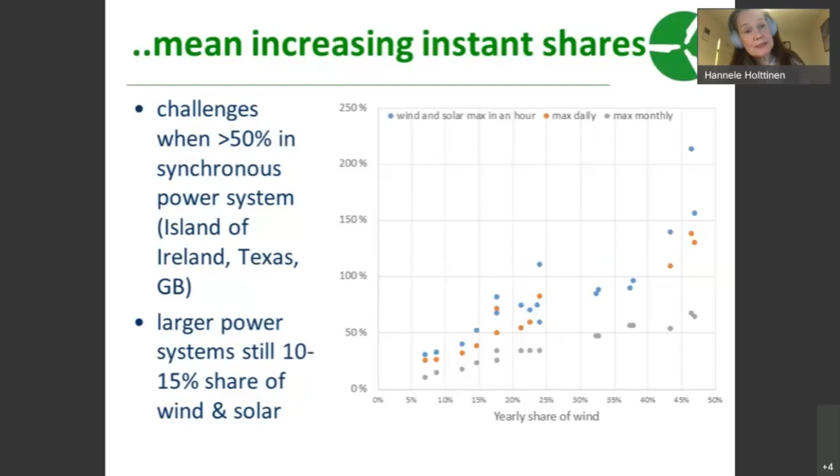Indeed, these statistics mostly cover countries, but what we really know about the challenges is when in a synchronous power system you have more than 50% share of wind or solar. And in these countries, of course it's Ireland, Texas and Great Britain that already have a synchronous system at more or less the country or state level. But for the larger power systems, we still have a 10 to 15% share, which is of course also increasing quite fast.

So the first thing we did quite a lot in the national work previously was to look at the time series inputs to the integration studies, and to capture the smoothing impact that is really pronounced for wind. So now we have more and more real data that can be used, and also better model data coming from meteorologists. But here are some examples.

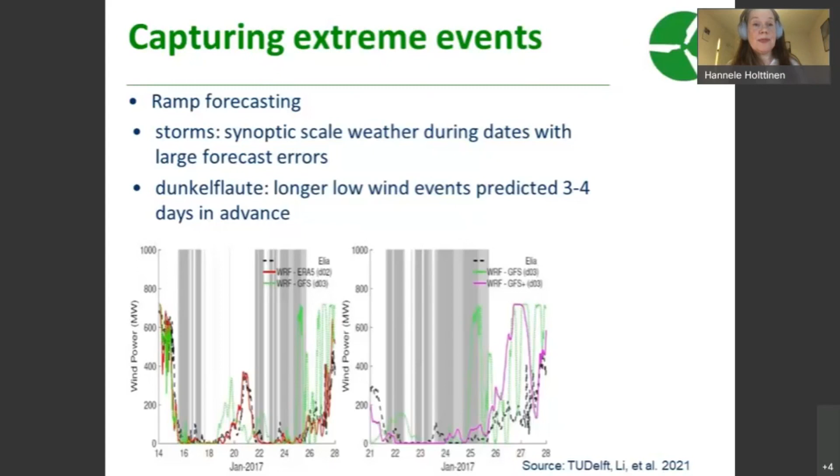And we have also interesting results from Germany showing how much of the large wind forecast errors are actually due to storms. And another thing, for the longer term resource adequacy, is how to capture what in Germany they call the Dunkelflaute. It's a no sun, no wind situation that can last longer, and predicting them seems to be now okay 3 to 4 days before. This picture shows the red line 2 days before quite well following the dotted line that actually happened.

And we see in all countries going for wind and solar that there are more investments in transmission, which can be partly integrated into renewals of aging assets. And to get this actually built means, at least in Europe, that public engagement with citizens and social acceptance is also something where system operators need to put a lot of effort.

Also, we see the benefits of looking beyond one country, at larger regional transmission planning. Here is an example from a recent ESIG publication summarizing nicely the transmission benefits of the larger interconnected system in the US, and even a macrogrid overlay.

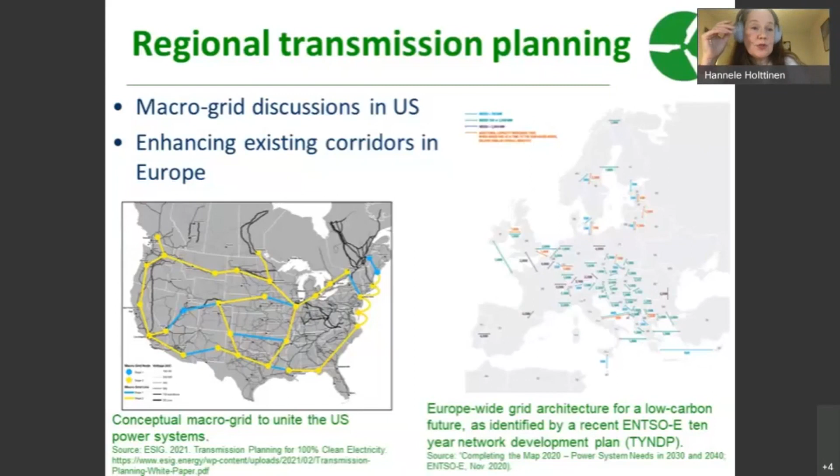And the European example is from ENTSO-E, the European TSO group that publishes every 2 years their 10-year network development plan. It has also been studied in Europe whether it would be beneficial to have a macrogrid overlay. So far, it looks like it's more cost efficient to go with the existing, pretty well meshed grid and reinforce that.

But of course, in Europe, what we see as a big new, almost macrogrid type of thing is the offshore grids. There's a huge ambition for the European Union and Great Britain to build more offshore wind power plants for reaching the net zero carbon targets, and to do that cost efficiently using meshed offshore grids and offshore hubs. Energy islands are a very interesting development. And still in development, because most of these offshore wind power plants are still connected with radial lines to one country. And the HVDC technology improvements are ongoing and indeed needed.

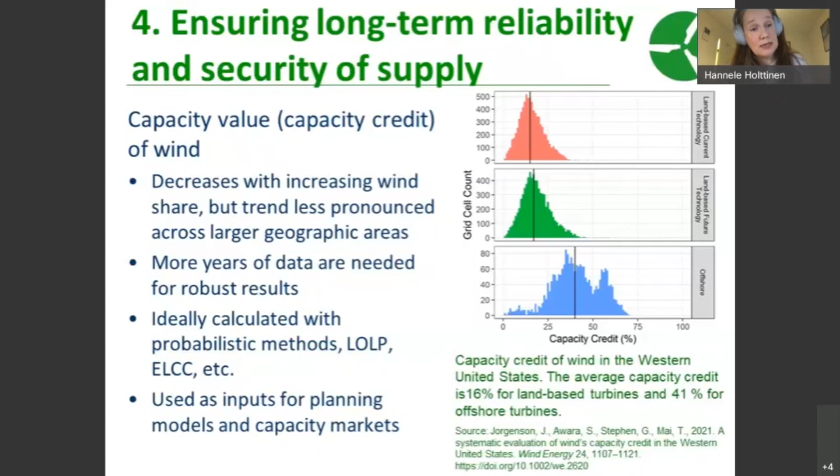And what we have seen very clearly in some examples is that you really need a lot of data to get robust results. In some countries, 10 years is enough, but in others, 20 or even 30 years of data is needed to really get robust results and capture all the weather events. Ideally, this is calculated with probabilistic methods like loss of load probability and effective load carrying capability. This is used as input for planning models, and capacity markets also need this kind of input for the capacity value of wind.

Moving towards resource adequacy in future systems, this is again showing some nice work from ESIG, looking at the improvements of the methods that we need for high share wind and solar systems of the future. It's important to include coordination with neighboring areas, have more data to reflect all the events, and also capture more about the potential loss of load.

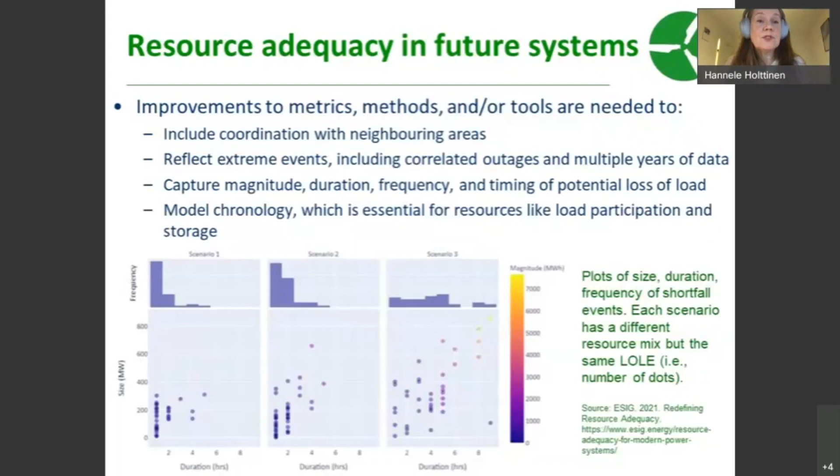Here is an example highlighting that even if your loss of load expectancy is the same in different cases, you can have either many shallow and short problems, or some of the events are really long lasting and severe. So you need to start looking more in detail. And I think generally the need for tool development is really high, because normally they don't capture chronology. And when we want resources like load and storage, we need the tools to work differently.

Then going to short-term reliability. The first example is the operating reserve. This has traditionally been the first result of any wind integration study, showing the impact of variability and uncertainty on the reserves that system operators carry. And the question is how much? Here is an example from a recent EU project, SysFlex, for one of their scenarios, showing the impact of reliability level. So basically, if you can lower the reliability target a bit, you have a clear impact on the operating reserves that you need to carry.

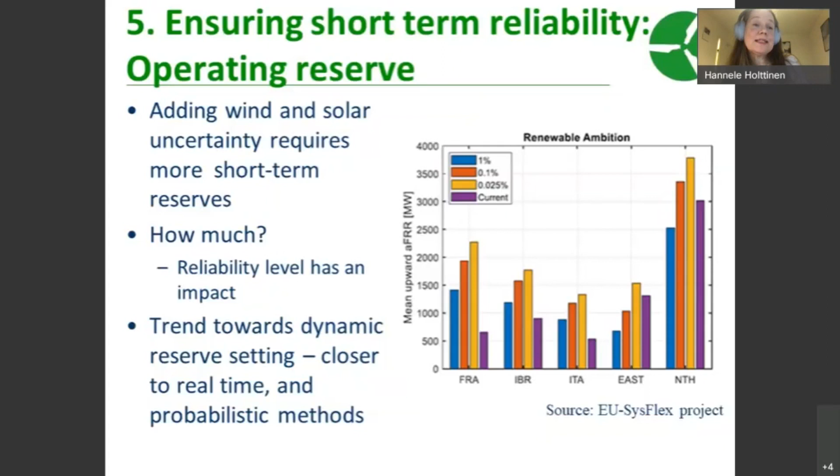Then going to another short-term issue, and that's the stability. So far from the experience, what concerns have there been? So basically it has been about responses to fault situations. So how is the grid code setting, for example, starting to require that the wind power plants have fault ride-through, and then having the experience from South Australia, very severe storms, having a lot of lightning, that actually you need to have many consecutive faults that you need to ride through during a storm.

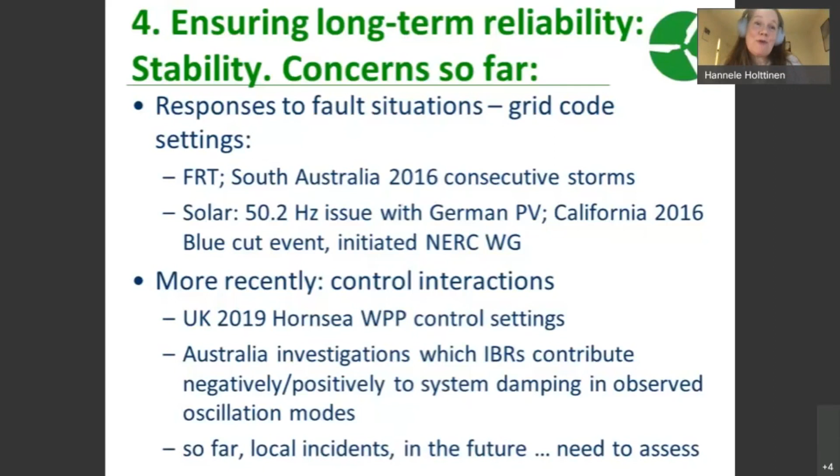But more recently, there have been also some control interactions that have been seen in the UK, and that has been investigated in Australia. So far, local incidents, but in future we really need to assess these more. And I think that the next ESIG webinar next week from the Great Britain system operator will tell something more about this.

For frequency stability, this was the main concern of the smaller system of the island of Ireland. So what they are doing is they limit wind. They have a so-called system non-synchronous penetration level that they follow. And if it goes over that, then wind is curtailed. And then as they get more and more wind, they have a program of enabling this in system operation, so they started with 50% and quite soon went to 60%, and now they are already reaching 70 and 75% SNSP limit in their operation.

For medium-sized systems, we have already seen that new tools to monitor inertia real time and day ahead are used, so it's important that they check even if these situations are rare. And for larger systems, it hasn't been an issue really. But what has been noted in the European system is that system splits could happen, and then again this can be more of an issue. And there's a recent ENTSO-E report looking at this more in detail that came out in December.

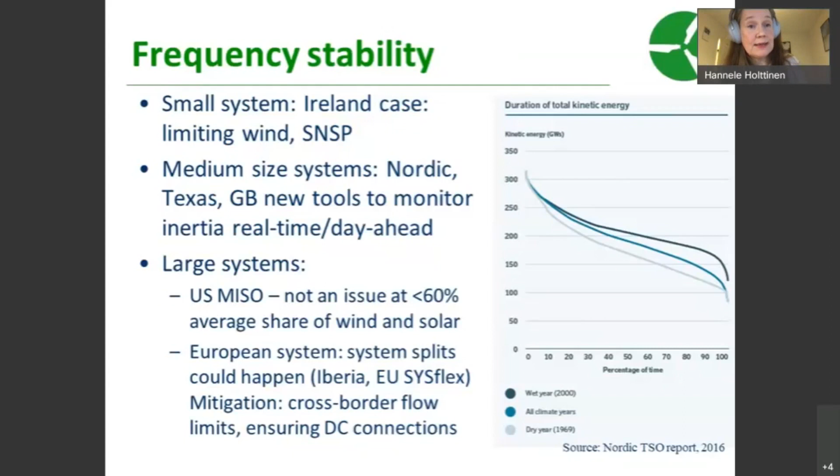So how to support frequency stability? You can maintain your inertia by keeping synchronous machines running, sort of must-run generators. This is a very traditional way of doing it, which works in the beginning. You have other sources of synchronous inertia, like synchronous condensers, or you can speed up the frequency response. So this fast frequency response is actually coming in several places in Europe and in Texas also, as a new frequency control service that will help the situations of low inertia.

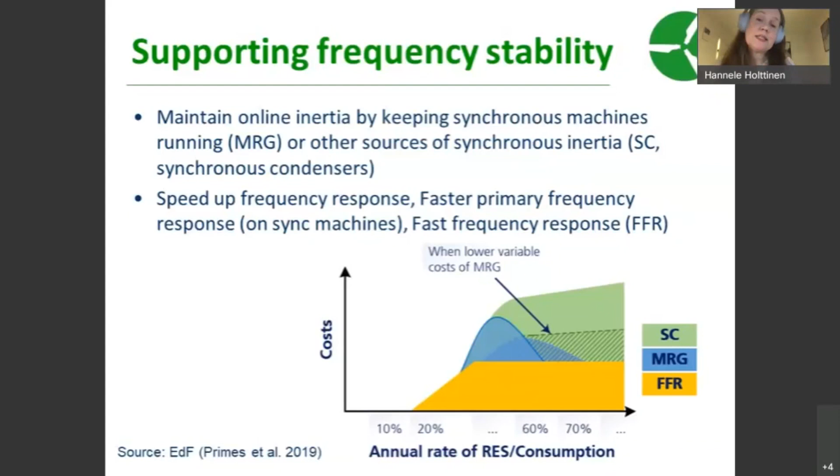And this is a snapshot graph from a French study, just trying to figure out the cost once you start having more and more wind and solar, so the options, what are the most cost-effective options there. So synchronous condensers are more expensive, but will have a lot of benefit at higher shares.

Also, some experience we already have is that faster response is more valuable. This example is again from Texas, and it's not only because wind has very well complying fast frequency response, but it's also other changes that ERCOT has been doing in their system. But wind definitely plays a role in here. It really helps in practice. And also they have studied how much more valuable the fast response is, having the same reliability impact from less megawatts if you have it faster.

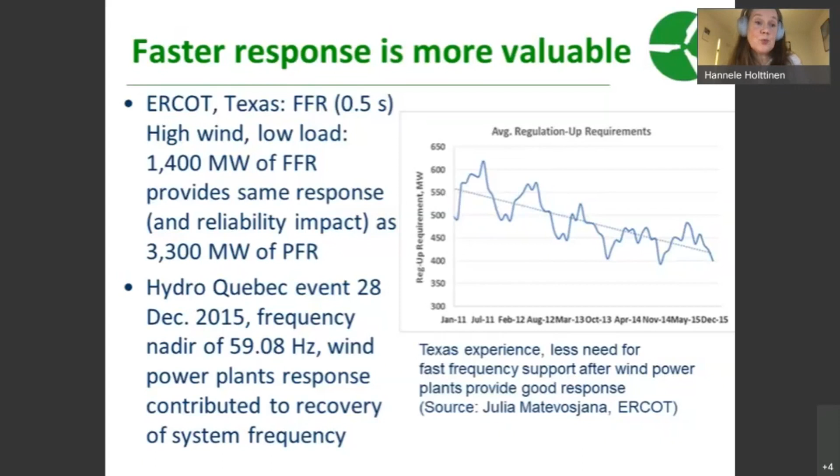And also Hydro-Quebec recorded an event. They have been requiring, in their grid code, this fast response from wind power plants. And when they had an event, they could actually then go back and see that wind was nicely supporting the system when recovering.

I think the Ireland case highlights quite well that when they first made a study in 2010 about reaching 40% wind share, where they are now about there, the voltage stability was not the issue, it was the frequency stability. But then looking further on, they have new, more ambitious targets for wind. So the constraint that they have had of having these minimum 8 synchronous machines operating at all times, now they see that when they have more than 40% wind, they need to relax this constraint. Otherwise, the curtailed amount of wind is too high.

What is happening there is they have quite dispersed locations of wind farms and different capability characteristics, and at the same time they have more high voltage cables coming. So it also becomes more complicated with the voltage control in the control room of the system operator, so they have now just introduced some new tools for that.

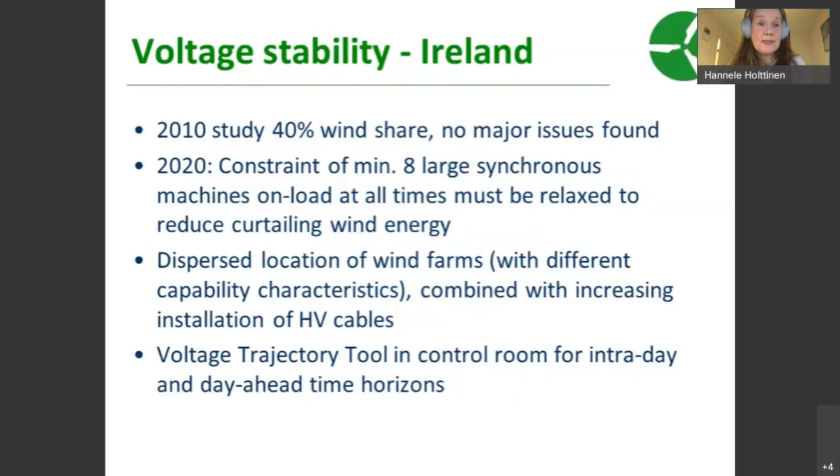Weak grids is another thing, because these dynamic stability issues increase sharply when you have higher shares of wind and solar. When you have a weak grid, you start seeing potentially more stability issues, and then including the IBR inverter capabilities will be highly beneficial and needed. And damping is one thing that is also seen in weaker grids, the need for damping and how to tune that.

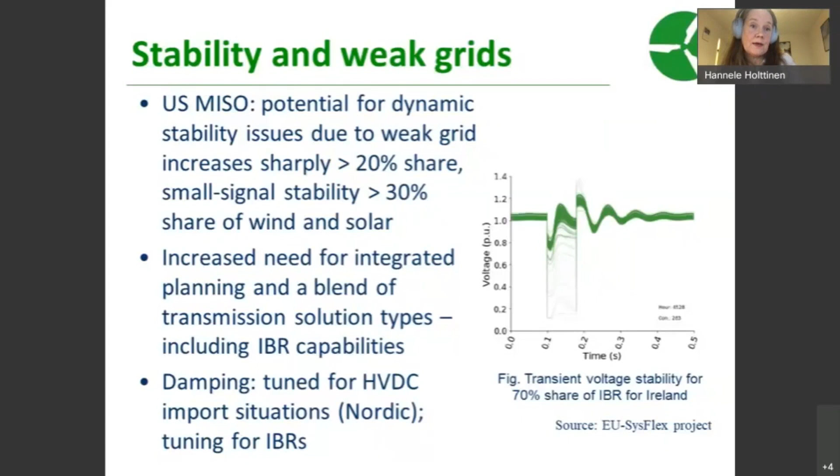Okay, so that was for the stability. Then going to more operational issues, we have given the heading of maximizing wind energy value in operations. Before going to that, we have a small chapter about estimating wind's value. When we started 15 years ago, integration cost was a concept that we really tried to study hard and look at the methods, and there were all these studies that tried to calculate the costs needed for balancing.

And after many years of hard work and a lot of discussions, it was concluded that I don't think there is a proper method of really doing this. Trying to capture a balancing cost or integration cost from the system is really challenging. And recently there have been published some quite interesting cases that if you just put different resources at different timings, you get different results for your integration cost calculations, showing that it's becoming a bit arbitrary.

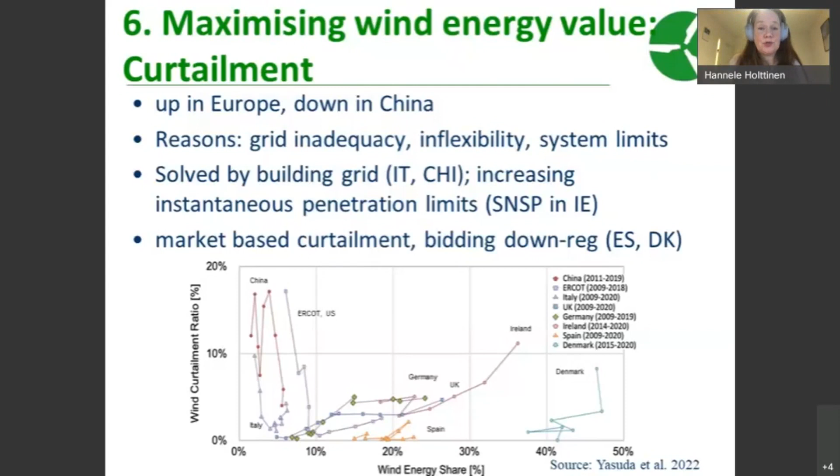What has been really nice to report is that China has been getting hold of its very high curtailment levels. But at the same time, we see that in Europe, in Ireland, Denmark, Germany and the UK, the shares of wind are getting higher and higher, and that also impacts the curtailments. We also see that some countries have market-based curtailments, so they are actually bidding down regulation and getting paid, which is not shown in these graphs. So this is, of course, also happening.

And then a really more high share of wind was studied in the US in the NARIS scenarios, and there you could actually see that, yes, there is somewhere curtailment occurring in the US almost every hour, but the bulk is still occurring in a small percentage of the hours.

Another thing, okay, curtailments can be actually used for providing ancillary services or grid support. And what has been shown in some studies is that once you reach more than 20% share of wind and solar, then it is cost effective that some wind and solar power plants are offering this service, because that enables some of the other power plants to shut down and gives more room for all of the wind fleet. But it doesn't need to be much. It can be like 10 or 20% of the wind fleet providing this service, and then it will benefit all. So there is system value for that.

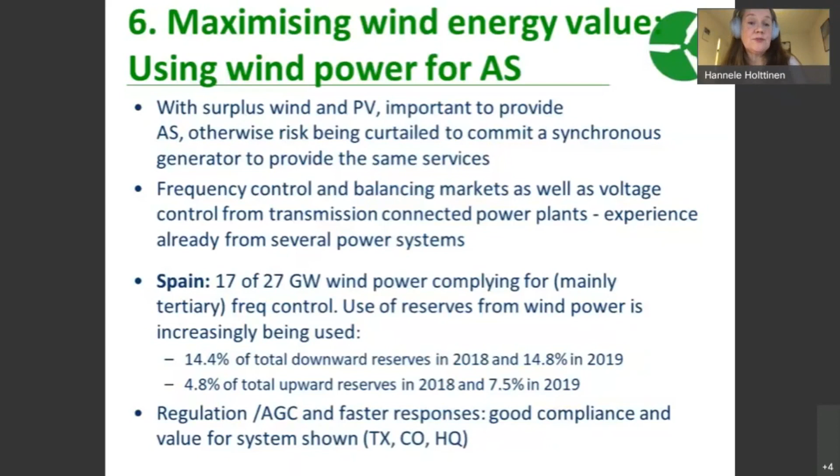There is already experience for several power systems for frequency control and balancing markets. Here is an example of Spain, where year by year more and more wind power plants are doing the compliance tests and complying, and they have several services, but they mainly use it for the a bit slower tertiary frequency control, where some statistics here just show that it's more used, of course, for downward reserve, and it's also a little bit increasing year by year how much they use it. And also, as shown before, having wind power plants provide faster response, it's good compliance, there's good value for the system shown.

And then about new services, that's also studied. So having power oscillation damping, having synchronizing power, restoration services, and grid forming inverters. So all these are already studied, not really used, but sort of preparing the system for future really high share wind and solar.

And then there is, of course, discussion on how these should be compensated. So which of the services could be offered for free, just required in grid codes, but which of the services could actually in future be paid for. Perhaps also voltage in future, and the really faster frequency control services that nowadays in many systems are not paid for. And then also when you have new system services, introduce them at the time when it's really needed, because it's also frustrating if you introduce a new service and then people make efforts trying to comply with them, and then they never get called for. So yeah, the system needs and the system services are definitely something that needs to be studied a lot.

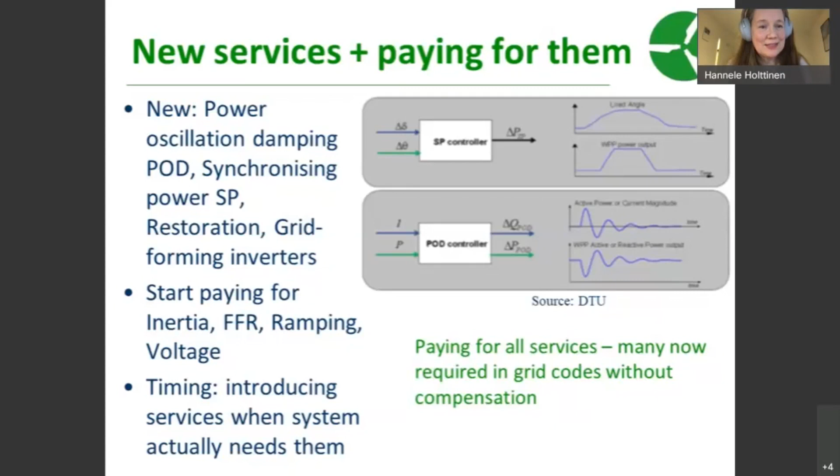For the operational practices of the grid, there is a lot that can be done to reduce congestion management, which can be one of the reasons of curtailing wind. And generally, of course, increasing efficiency of how you use your existing grid is important. So basically, all the margins that you have, you can really use stochastic weather forecasts and probabilistic methods and try to get these security margins right, as little as possible, but still having the reliability you want. You can use dynamic line ratings, you can use advanced power flow control, like phase shifting transformers.

Here is an example of the Italy system and what they have already built and are building there. They have had in Italy a real challenge having most of the wind in the south and most of the demand in the north. Topology optimization is something where there are some examples in the report of the French system operator of what can be achieved. And also here it looks like the more wind and solar you have, the more benefit you have from these kinds of methods.

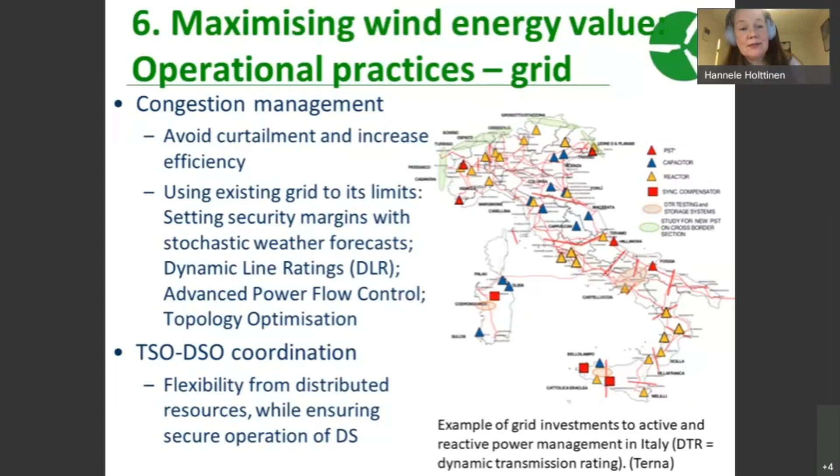Also in Europe, there's a lot of talk about TSO-DSO coordination, so the distribution system operators or the distribution utilities become also system operators and have more control over the resources that are built in their grid, but how to make sure that the flexibility resources are used for the common good when possible, while still securing the secure operation of the distribution system.

Flexibility is a really big topic for many studies, and it's really a main enabler of larger shares of wind and solar. And we have seen many examples of how thermal power plants can be retrofitted to be more flexible. You can use combined heat and power and heat pumps with heat storage and provide a lot of flexibility and coupling from heat to electricity. Increased transmission always has very good cost benefit in the studies, always, at least from what I've seen.

Hydropower is very valuable where you can have it, both pumped hydro and larger reservoirs. And storage is emerging, but the price of batteries is getting lower and lower and starts to be on the level where it really becomes interesting also for power system applications. And then demand response, and sometimes storage is sort of part of demand response, like with electric vehicles, for example, that the consumers have some assets that have storage and can be used.

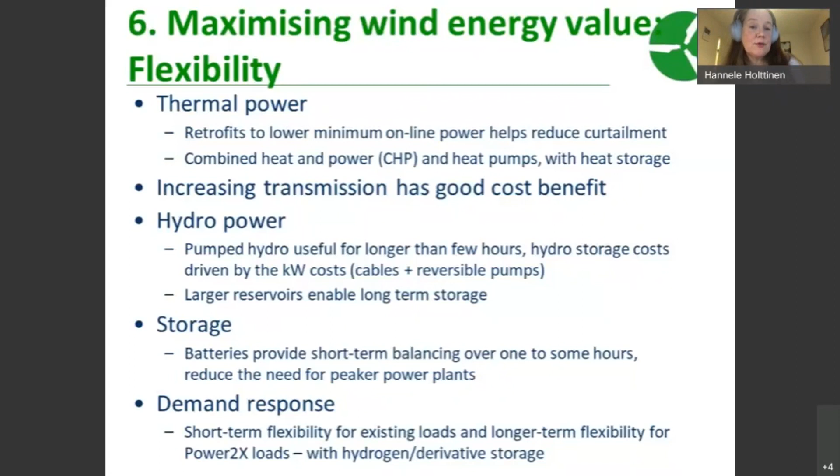And then for the longer term flexibility, actually these new types of loads, power to X, producing hydrogen or any derivatives of hydrogen, is very interesting and can be made in a way that is more flexible. Here I have some examples from Denmark.

So the first example is just showing the value of their existing flexibility. They have some scenarios and they simulated how the market prices would have been without the flexibility that they have, which is mostly the flexibility of a lot of interconnections to neighbors and their thermal flexibility. So what if they didn't have that flexibility? How would the market price have been? And then for wind power, the changes would have been really, really high.

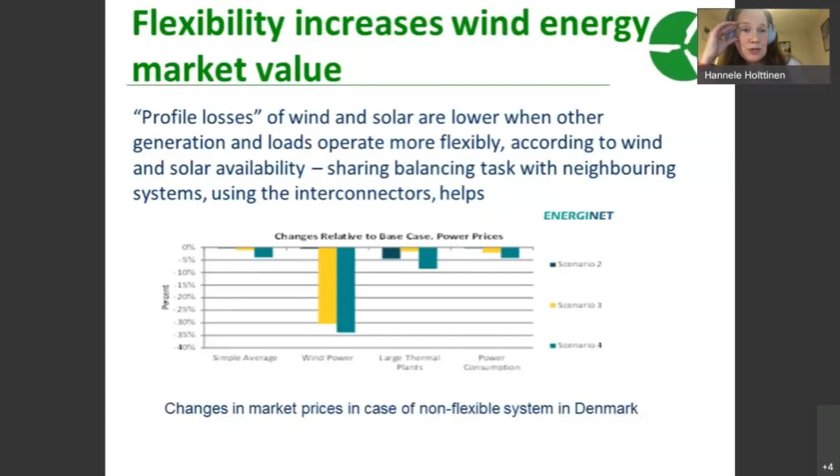So Denmark still doesn't have a lot of so-called profile losses. So wind power plants get close to the average market price for day-ahead markets, even if they have 50% wind on average. And this is mainly due to having extremely well-used flexibility of the interconnections between neighbors. And what they are looking at for the future is that another new flexibility may come.

A little bit summarizing, it's also about market design, but it's flexibility to avoid the low price energy and larger and faster markets. All this will help in maintaining the value of wind in the future, and also providing grid support from wind and solar is another way of increasing the value of wind. And there you need to have the market design such that wind power plants can bid. So close to delivery and smaller amounts of megawatts or only bidding down regulation are the things that make a difference when you have wind power plants in the markets.

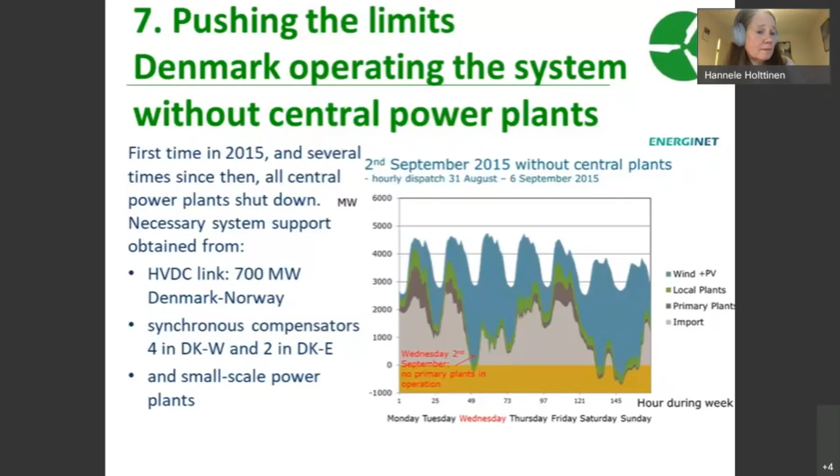And you can see here, it's marked in red, that on a Wednesday in September several years ago was the first event that they actually did it. So the yellow is showing exports. So there were no gray color big power plants there at all. But this is what is happening in Denmark now more regularly.

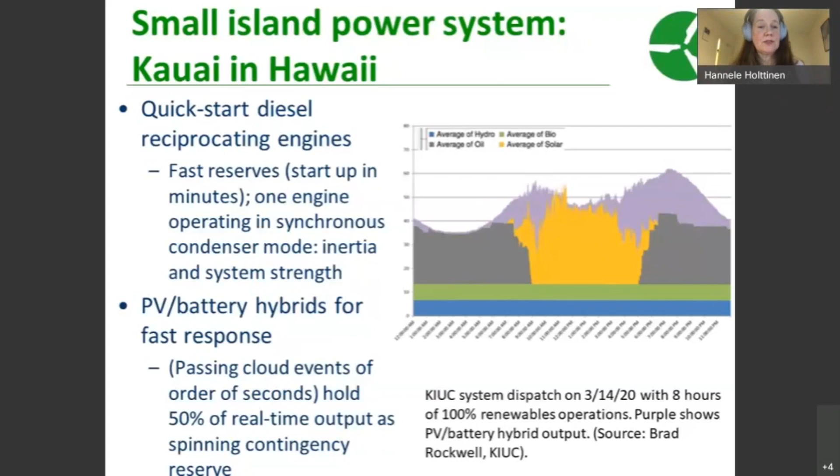Another interesting example is from an island system in Hawaii, where they have been operating with about 90% PV. So what they do, they have the diesel reciprocating engines as fast reserves and in synchronous condenser mode, and also to cover for passing cloud events, they hold some of the PV curtailed, and then they can have a spinning contingency reserve from PV as well.

So we have these towards 100% renewable power system studies, and more and more we also see that electrification is foreseen. So actually new kinds of demand are coming to the power systems. Most of these studies look at the hourly energy balances, so really not looking at stability effects. But anyway, they show feasibility that the energy balances would be okay, even if you have wind and solar covering most of the load.

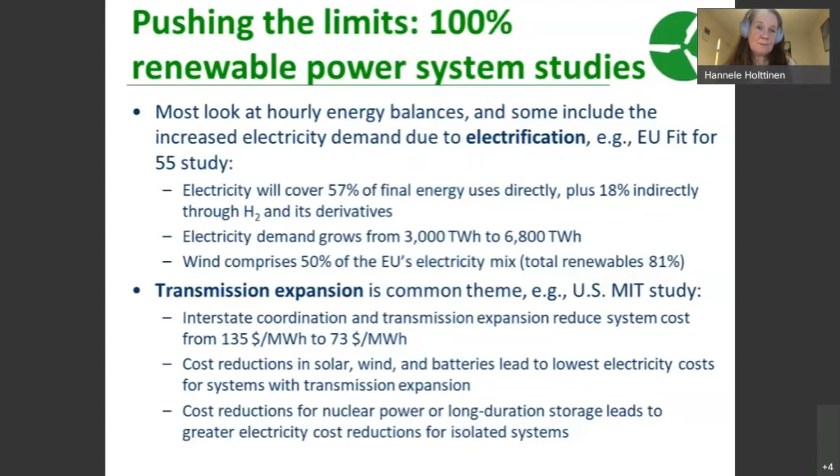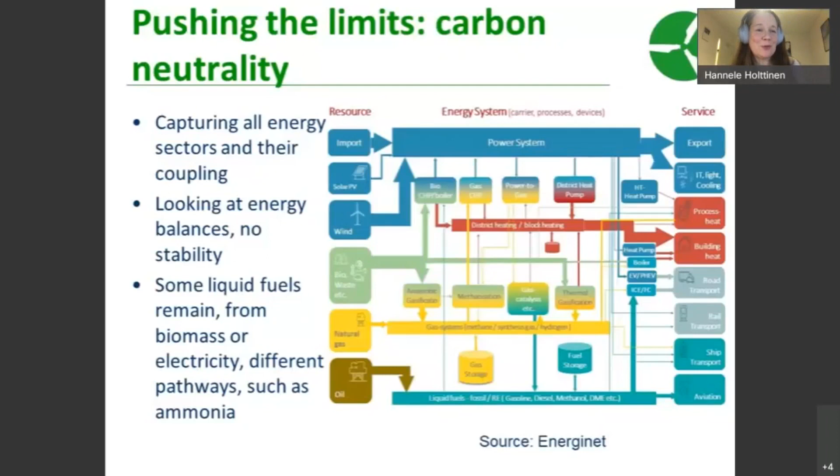Going on, there are more net zero carbon studies coming, where all energy sectors are captured and their coupling. Again, the studies we have so far are just looking at the energy balances, no stability, and then how you do this, how much liquid fuels remain in your system, and how much is direct electrification. There are many different pieces of the puzzle that can be put together in future, and I'm sure there will be many more studies coming up.

And yes, pushing the limits and making these studies, you really need some tool development when you start looking at these towards 100% studies, power systems dominated by wind and solar. There will be more complexity, need for higher resolution, need for simulating large areas, and integrated planning and operational and stability tools. So somehow they need to be linked more, and the constraints coming from the other models need to be seen in the other models, and also some new paradigms are needed, like cost versus risk, how you think about future resource adequacy, for example.

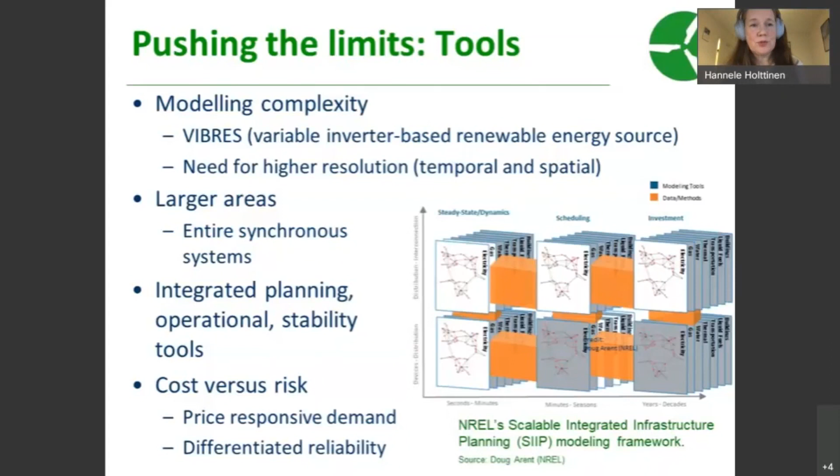Okay, so to conclude, wind and solar, we call them VIBRES, the variable inverter-based resources. They will make a large contribution to future decarbonized energy systems for sure. And they do have potential to even form the backbone of the future power systems when the full range of inverter capabilities are used. However, we do need some new paradigms of non-synchronous power system operation, and also new paradigms for how you look at long-term resource adequacy.

We get a lot of experience from operating and planning systems with large amounts of wind and solar, and research to tackle the challenges is well on the way, and we see a lot of opportunities for inverter-based resources, and also a lot of opportunities coming from energy transition and digitalization, bringing new types of flexibility that so far we haven't seen.

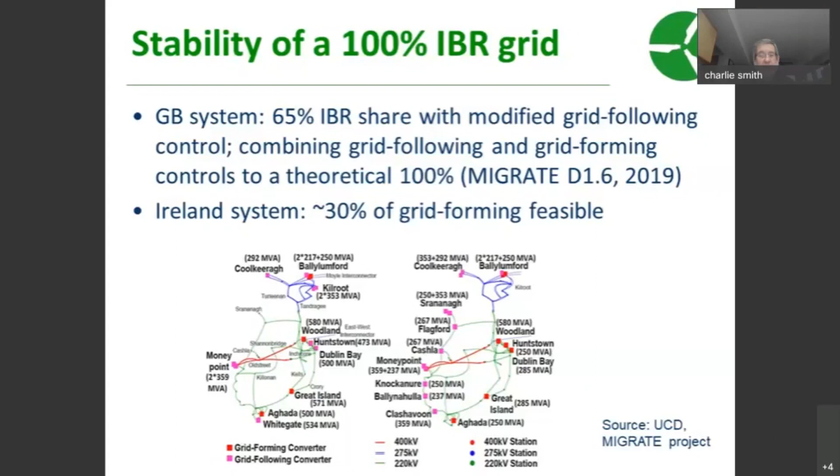Let's go ahead and move to the Slido. I see we've got a lot of questions here. One from Russ for our European colleagues. Future resources need to be valued for their reliability contribution, even if not called for energy. What is the European perspective on paying for capacity? Are you wrapped around the wheel with capacity issues like we are here in the US?

There is a lot of talk on that, and ENTSO-E has been developing a methodology for capturing the multi-area issues of looking at resource adequacy, because it's clear that if every country and system operator makes its own calculations, they will start building a lot of backup that will not be needed in a well-meshed common European market.

So actually what they did was that they said that before you can start paying capacity payments for any of your generators, especially the fossil fired generators, you need to prove that, taking into account the interconnections to your neighbors, you really need it. And this is at least one part of the picture. But I think for the tool development, it has been very interesting to see how ENTSO-E has been developing the tools, because they are using a chronological tool that can capture in future also other things perhaps easier than the previous tools that were used.